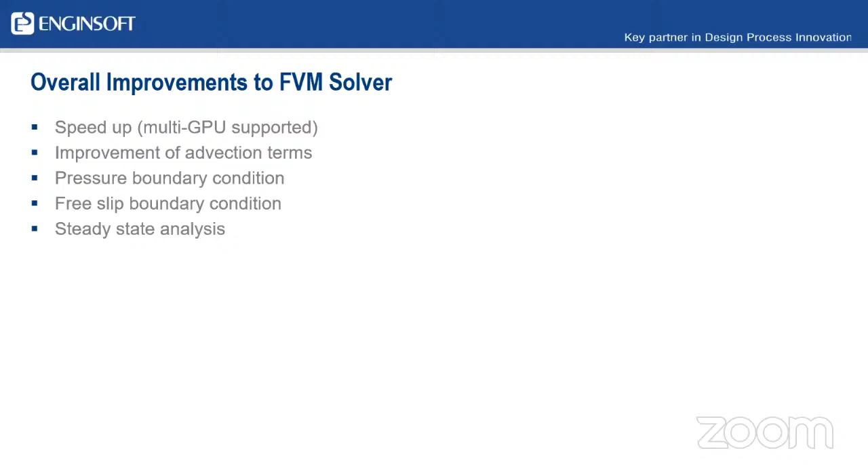So just going through the list real quickly, this was something that we briefly touched on in our last tips and tricks. I'm just going to kind of glance over it again in today's session. With the multi-GPU, when we're trying to do this, by default we have a domain decomposition that's set as default. We need to change that in either the X, Y, or Z direction, and that'll help stabilize our multi-GPU calculations.

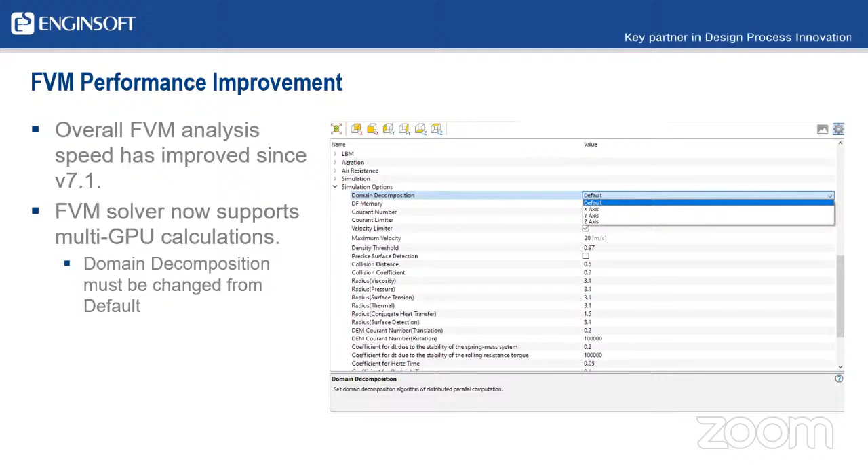The other option, which I don't know that a lot of people have had a chance to really dig into yet, but we now have 3 different options. The first one being the PISO option, which is present in version 7.0 and in 7.1. This is a transient calculation. So when you were previously working in 7.1, this was the option that was actually the only one available - it was either none or PISO.

Now in 7.2, we have an option called simple, and this is going to be the steady state calculation. And then we also have a SIMPLE->PISO option, which is a steady state to transient successive calculation. Those are going to be in the drop-down menu whenever you enable the FVM solver.

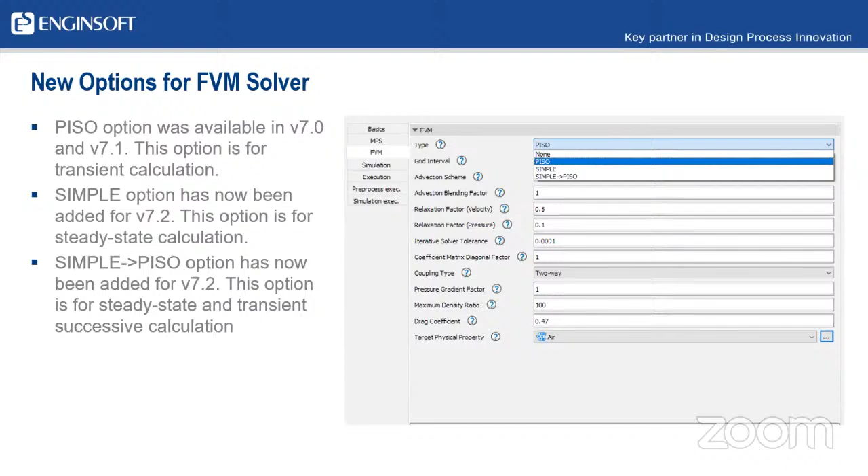So some of the options that are new: when we select the SIMPLE->PISO option, we can now define a maximum number of iterations. By default, that number is going to be 1,000. We can also specify the tolerance for convergence criteria. By default, that's given as 0.001, and that's going to be a dimensionless value.

I believe those that are familiar with traditional tools know that's something we can play with as we're solving an air phase simulation. These options have now been added to Particleworks 7.2.

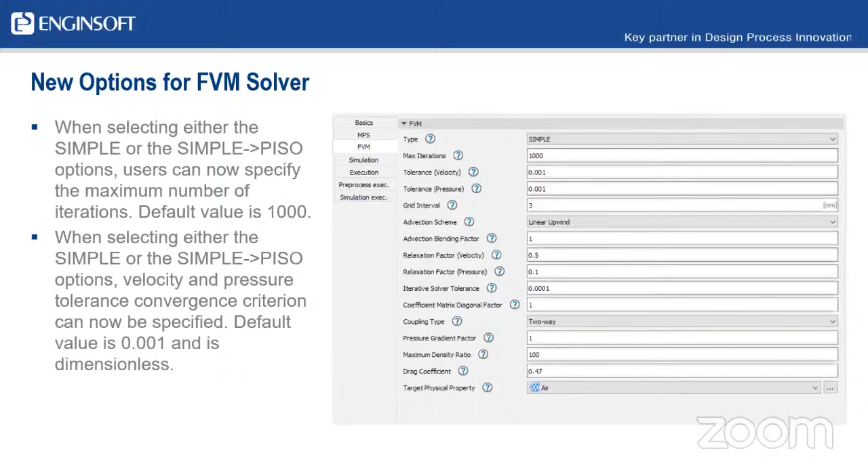So one of the other big changes is the advection term. In the previous versions 7.0 and 7.1, the only advection term that we had was what we called upwind. The developers at Prometech have now not only given us back the upwind, but they've also introduced a linear upwind. The difference is the upwind is going to be our first order upwind scheme, and the linear is going to be our second order upwind scheme.

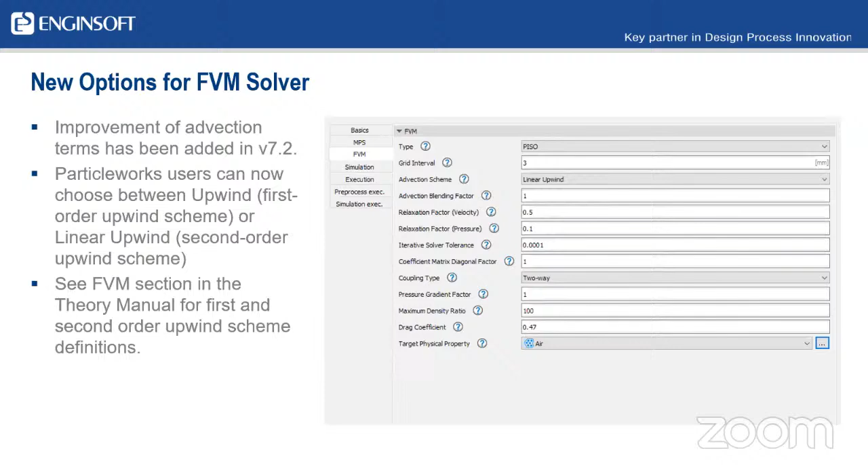I thought about putting some of the calculations in here, but honestly there's just too much information to put into these short slide presentations. So if you're interested in knowing the differences between the first order scheme and the second order scheme, you can definitely check out the FVM section in the theory manual. It does a really good job of explaining the differences and the breakdowns in the equations. I didn't put it on here, but I'll go back and edit what chapter and section you can find this information in.

When we do select the advection scheme to linear upwind, there's a couple of factors that we can manipulate now. The first one is a blending factor. This is for our gradient term of the advection, given in a range of 0 to 1. 1 is going to be the default, and again this is going to be a dimensionless factor.

Looking through some of the documentation for this stuff, if we set this value equal to 0, that's going to take us back to just the upwind first order scheme. Some notes given in the theory manual say the more we increase this, it makes the simulations more accurate, but the stability might decrease a little bit. So just kind of be careful whenever we're messing with this, and just adjust it when it's needed.

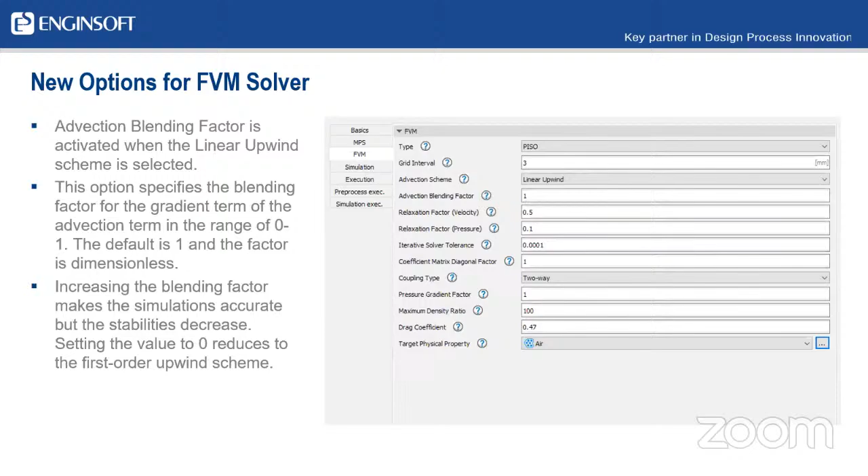Another thing that's been introduced was the addition of pressure boundary. I believe in 7.1 we had the possibility of adding velocity boundary. So the way we can do that is if we're in Particleworks, and it took me a little bit to kind of figure this one out, but if we go into our miscellaneous folder, there's going to be some new options that those that are familiar with Particleworks haven't seen in previous versions. It's going to be here in the FVM boundary.

When we select this, we'll have to look in the detail section, and that'll come up in our FVM boundary, and we can select either a pressure boundary or a velocity boundary. The pressure boundary is going to be a fixed boundary pressure. By default, those units are in pascals, of course. And kind of like the velocity boundary, we can actually define time varying options for both our velocity and pressure. That can be done through the keyframe option.

One thing I would recommend, as I was looking through this stuff, is to use the user manual. That has some really good information. Again, kind of similar to the theory manual in the previous slides. There's quite a bit of information, not enough for me to put in the slide, but if you're interested in those, I definitely would check out the user manual for that.

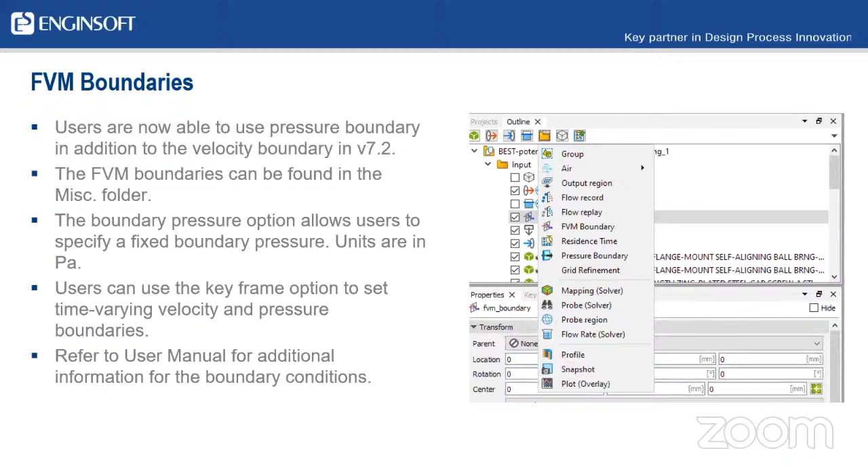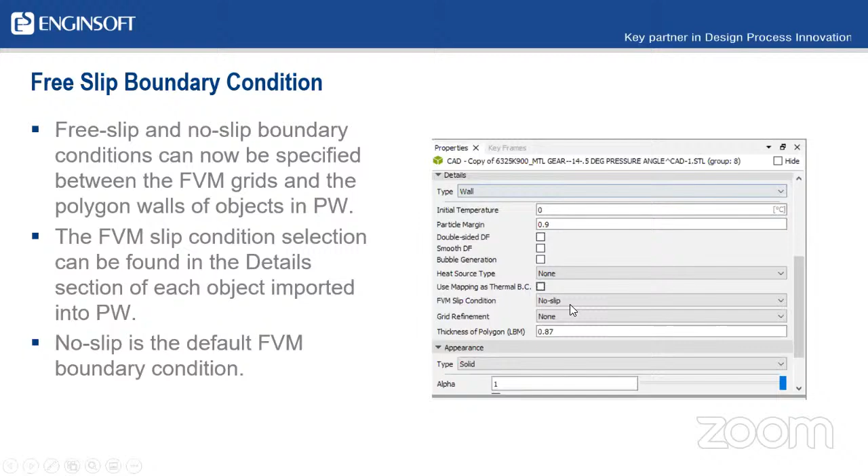Another new condition that's been added is either a free slip or no slip boundary condition. We can now specify either one of these boundary conditions between the FVM grids that are generated and the polygon walls of objects inside of Particleworks. And the way to actually do this is when we bring in all of our input objects and we set up a finite volume grid, we have to go into each of those objects found in Particleworks. This is going to be found in the details section, and there's a little bit more information. Now we have the FVM slip condition. By default, that's going to be a no slip condition.

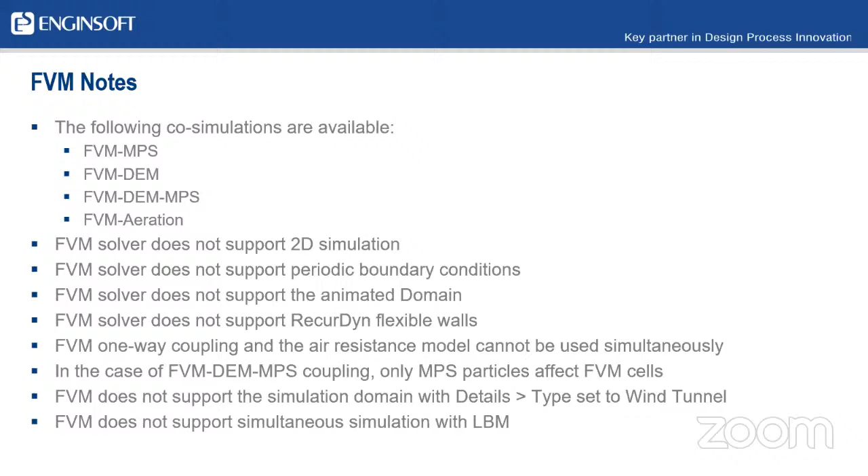With that, I'm going to pass the torch back over to James. He's going to talk a little bit more about the FVM solver. Thanks, Chris. Let me share my screen.

So as Chris had mentioned, I'm going to be talking about the new steady state solver that's available for 7.2. Really quickly.

All right, so before I dive into some of the details, I want to do a level set, I guess, on what options there are for dealing with the air phase in Particleworks.

So the first thing, and I wanted to label this as option 0, but turns out PowerPoint doesn't support indexing from 0. You can only do 1 or greater. So that was fun to learn.

So the first option is to just ignore the air phase entirely, and that's kind of the default, but I wanted to include it for completeness. Then the next thing is specifying an airflow field. You can either do this manually or with an imported flow field from some third-party CFD tool.

And when I say manually, I mean for a very simple flow field, you could type out the CSV file manually. I think I've done this in the past. If you have, I want air blowing from the right to left at 10 meters per second, something like that. You can always specify that by hand.

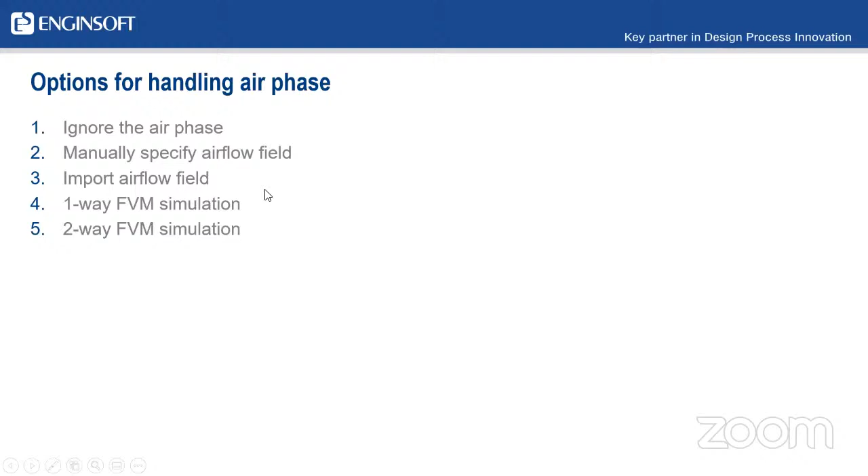Now, why would we want to do this rather than running the co-simulation? And the simple answer is that it's slower, right? So using the FVM solver requires double precision, and depending on the hardware, this is either going to be somewhat of a slowdown or a very significant slowdown. So if you can sort of break out these phases, then your computes can be more efficient.

The other kind of disadvantage to the method that Prometech uses is that you have a uniform grid size. So this is great for usability, makes things a lot simpler to set up, but the downside is always you have less control. And the grid size always has to be related to the particle size. So sometimes you want those to be at completely different length scales. And by splitting these up, you have a little bit more control.

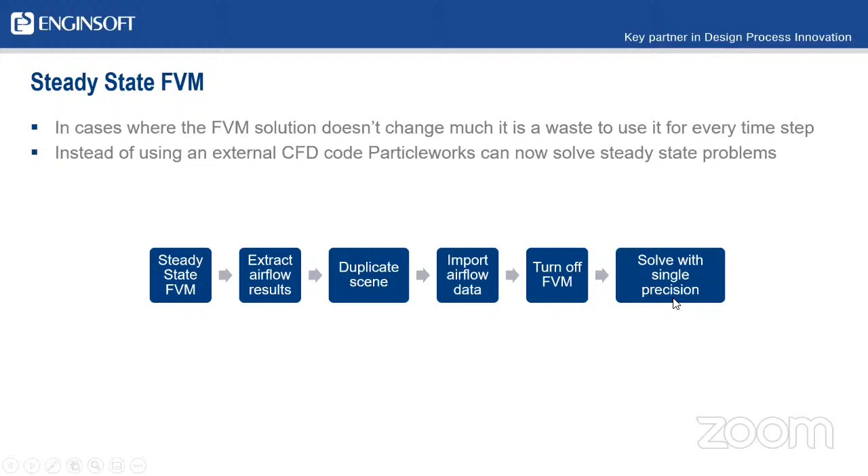So what we do, the general overview, we run the steady state FVM solver. We then have to extract the airflow results, and this is probably the most complicated part of it, or requires a couple of additional steps. Then we duplicate the existing scene, import that airflow data, and then turn the FVM solver off, and we can solve with single precision because we're just using MPS.

So how do we use the steady state solver? Chris kind of mentioned this already. We changed the solver type for the FVM solver to SIMPLE instead of the default, which is PISO. And then we assign the correct fluid material. So you'll have to have some air material phase.

And then the one thing that's easy to make a mistake on is if you use ramp ups in your keyframes, then you want to make sure that whichever keyframe values you are going to be running the majority of the simulation at, you need those to be set at t equals 0, because the SIMPLE solver is only going to evaluate at t equals 0.

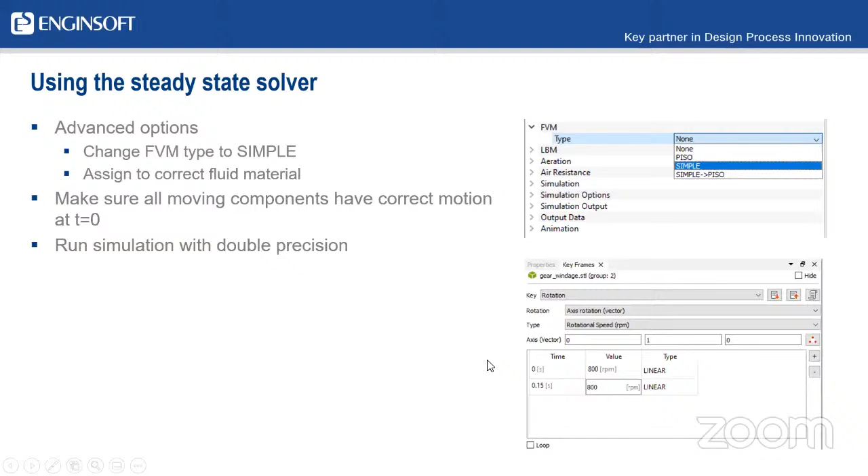This is sort of an example of what I did when I was mocking this up. I was using one of the tutorial models, and it has you do a keyframe at 0 seconds for 0 RPM, and then it ramps up to 800. So the simplest way to make it 800 at 0 is just modify this one keyframe, and then it's running a constant value. Then we run the simulation with double precision, and we get our results, right?

Now the process for extracting that airflow data isn't necessarily obvious, but the basic idea is that we're using the profbin to ASCII tool because Particleworks is always storing all of the result data. In the case of MPS particles, that's going to be each particle has a row in the results file, and all of the properties associated with that particle are listed out in separate columns.

For the FVM solver, it's very similar, but instead of each particle, it's each node or each cell in the FVM mesh. So we can use the profbin to ASCII tool to extract out that data into a human readable format. Run that tool, it'll give you an out_000.prof instead of .profbin. And I did a previous presentation on the profbin to ASCII tool and kind of the format of this file if you want more details.

But the key takeaway is that we want to copy that file, that out.prof file, and then change the extension to CSV, not CVS.

The one thing I wanted to mention: if you make that change and it still doesn't let you open it in Excel, there's a good chance that you have file name extensions turned off in File Explorer. If you turn that back on, you might find that it's .prof or .csv.prof, and you just have to remove the .prof at the end.

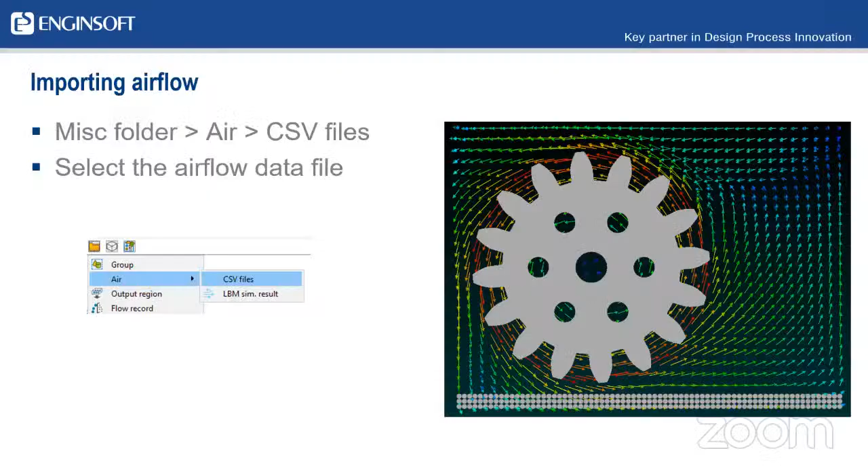But that's kind of all there is to it. Really the only non-obvious part of this is extracting the airflow data using the profbin to ASCII tool.